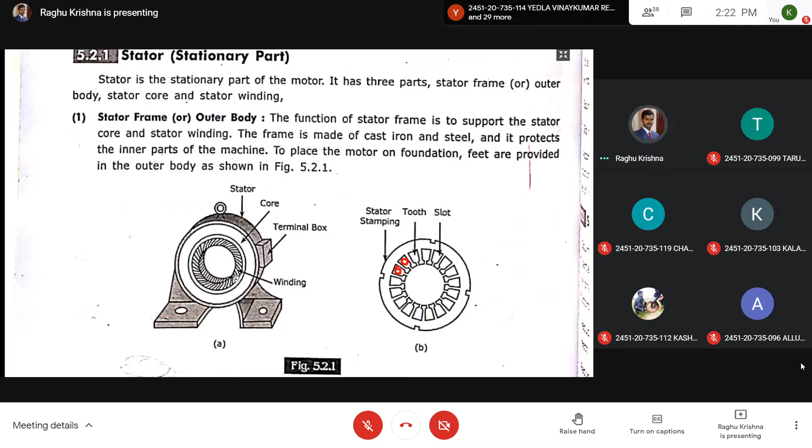If you see a stator, this is the stator. The stator has the stator frame, which is the outer body. Next you have the stator core, and on this core you have the winding. So stator frame or outer body, and on that the core, and on the core the winding. The winding is three-phase winding, and it can be connected in star or delta based on our requirement.

Now here, the stator core is cylindrical in shape and is made up of high-grade silicon steel laminations. The stator core is laminated to reduce eddy current losses. The thickness of the laminations will be from 0.3 mm to 0.5 mm. You can imagine the thickness of the lamination.

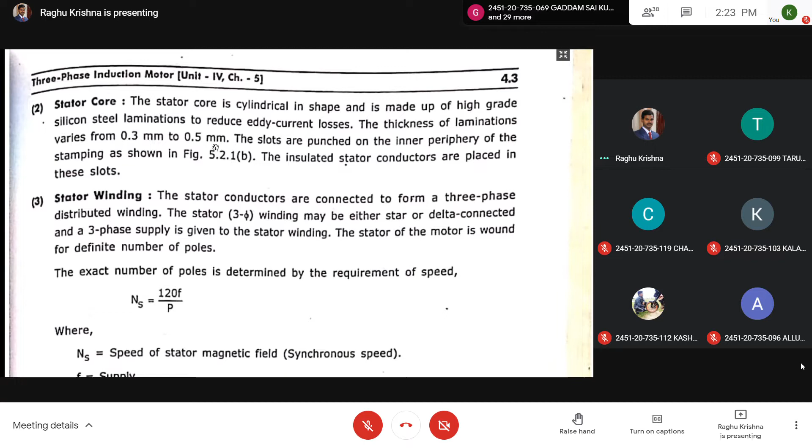Next, the slots are punched on the inner periphery of the stampings as shown in the figure. Here you can see the slots, and on the slots you are going to have the winding. These are the stator stampings, and like this you have the laminations.

This is the cross-sectional view of the motor. Here you can see the wires or the winding. The winding will be placed in the slots, and the winding will not come out of these slots, since the gap is very less.

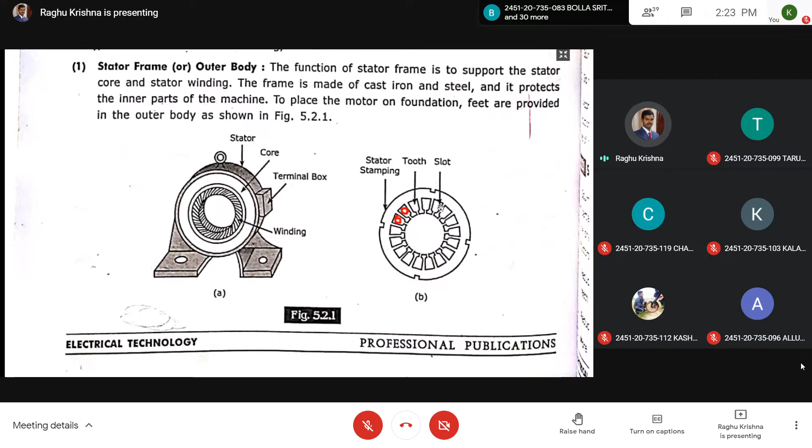The stator conductors are connected in the form of a three-phase distributed winding. The stator winding may be either star or delta connected, and three-phase supply is given to the stator winding. The stator of the motor is wound for a definite number of poles.

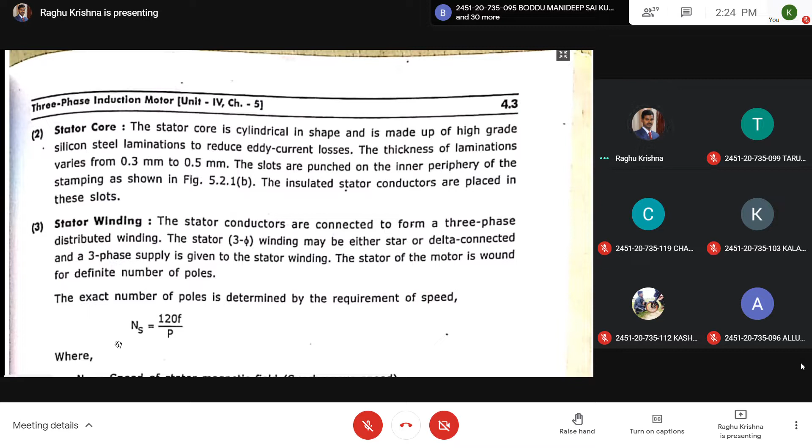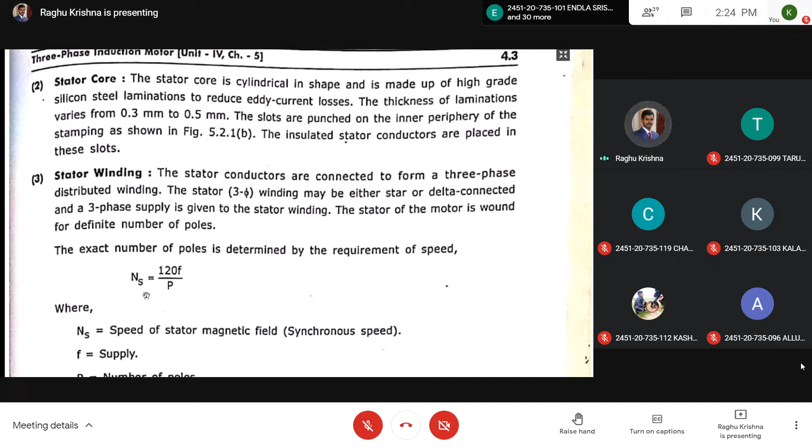Next you are going to study about the synchronous speed. Ns equal to 120 F by P. Ns means synchronous speed, given by 120 F by P. The importance I will explain now. Ns is the speed of the stator - it is the synchronous speed, the speed of the stator magnetic field.

Any doubts? Somebody raise their hand. Okay.

So here Ns is the speed of the stator magnetic field. The stator magnetic field will be rotating at a speed of Ns, which is the synchronous speed. It is given by 120 F by P, where F is the frequency and P is the number of poles.

If you take a two-pole winding, it will be having one north pole and one south pole. If you take a four-pole winding, it has alternatively north pole, south pole, north pole, south pole. So like this, if you take a two-pole...

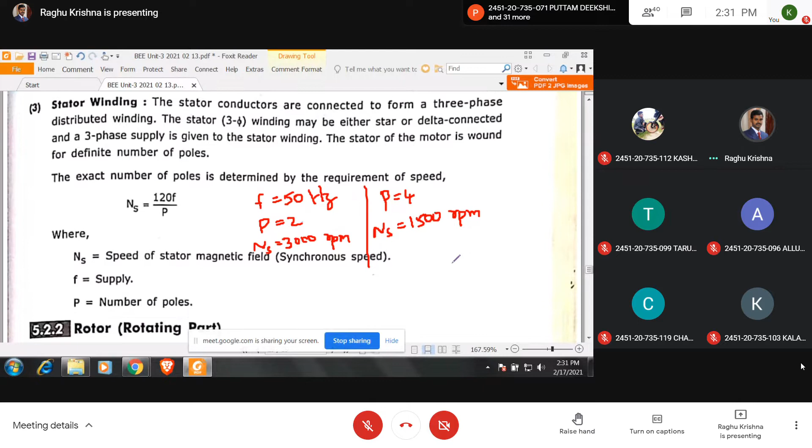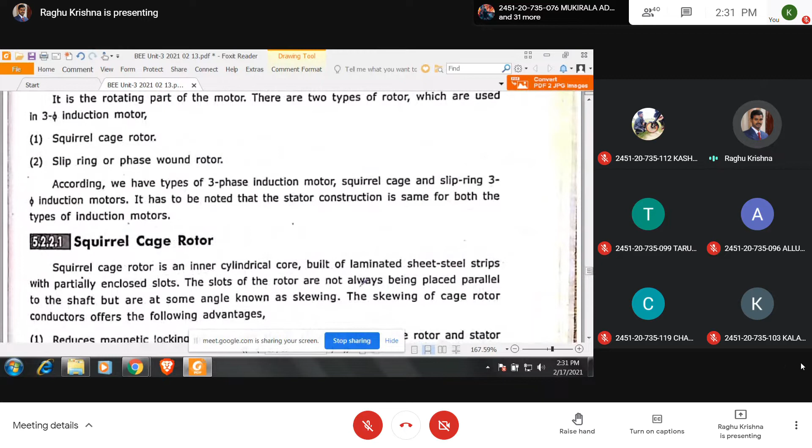Before going to that, let us see this rotor also. A rotor is of two types: the squirrel cage rotor, and this is a wound rotor motor. On the wound rotor, you are going to have three-phase winding.

The rotor bars are given a slight skew in order to avoid magnetic locking. So here the rotor bars are not straight, there will be a slight bend. See here, in this it is clear.

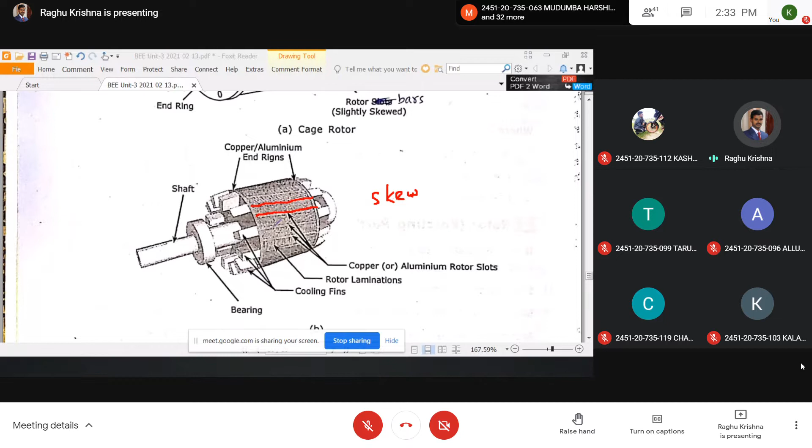Skew means some cross, they are arranged in somewhat a bend. See here, this is given in order to avoid the magnetic locking. So the rotor conductors are given a slight skew in order to avoid magnetic locking.

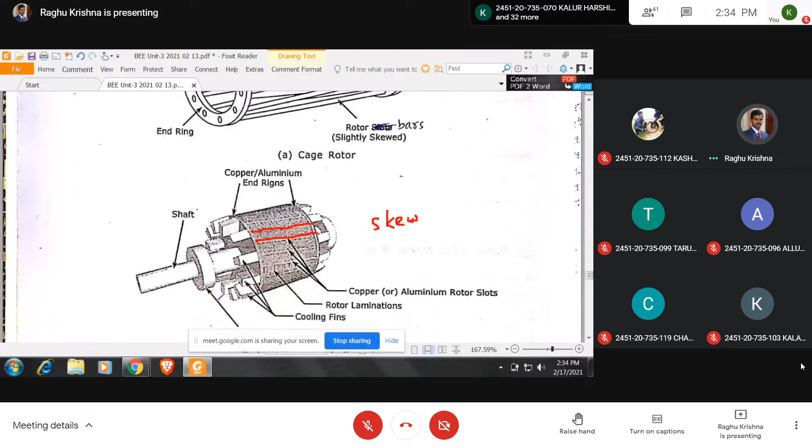Now on the rotor you are going to have these rotor conductors. See here, if you see the above figure, these are only the rotor conductors. The rotor conductors are connected by end rings. These will be present on this rotor. On the rotor you are going to have the rotor conductors.

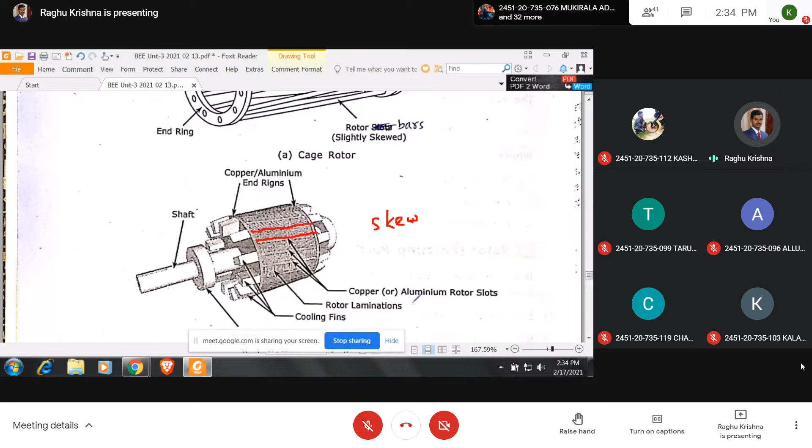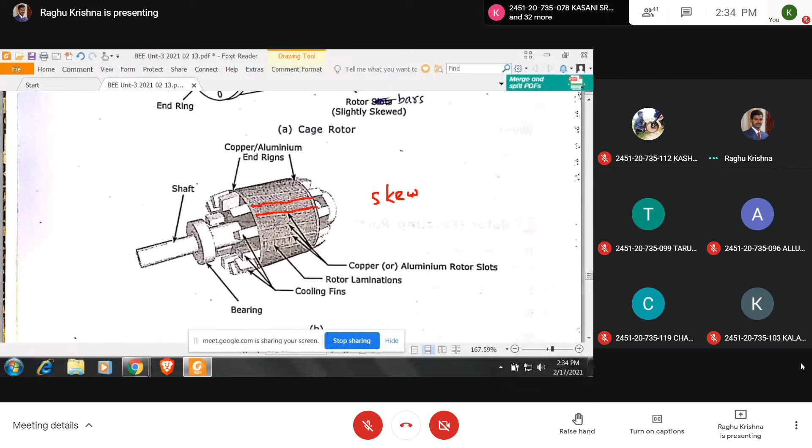The rotor is also laminated in order to reduce the core losses. The rotor conductors are made up of copper or aluminum, and these rotor conductors are placed in the slots. Slots will be given, and on the slots, rotor conductors will be placed.

So the slip rings will be rotating, the slip rings will be rotating with the shaft. The slip rings are attached to the shaft, when the shaft rotates, slip rings also rotate. The contact of a resistor with the slip rings is obtained by use of brushes. So brushes will be stationary here, brushes will be there.

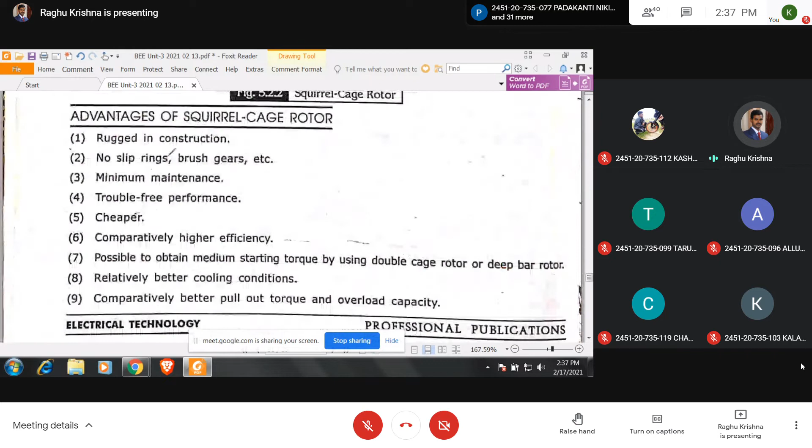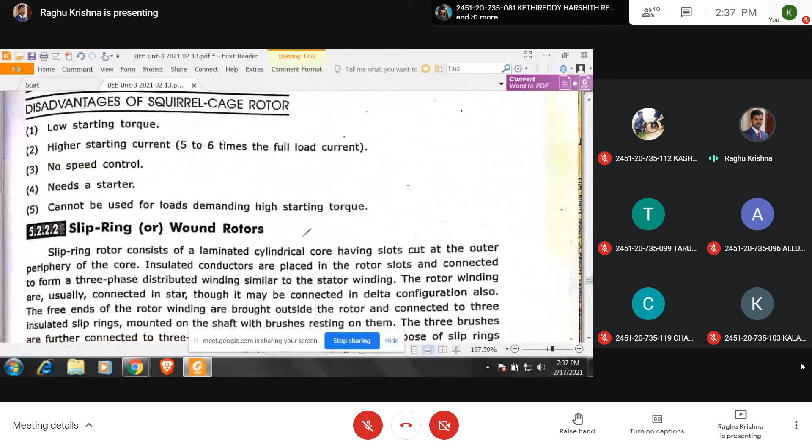So in a wound rotor induction motor, both the stator and rotor have three-phase winding. But in a squirrel cage, on the rotor we are going to have rotor conductors, and the rotor conductors are connected to the end rings. But in a wound rotor, the rotor conductors are connected in a three-phase winding.

So here three-phase winding will be there on the rotor, and the ends of this three-phase winding will be connected to the slip rings, and the slip rings are connected to resistors through brushes. So this is about the construction. Now coming to the operation of this three-phase induction motor.

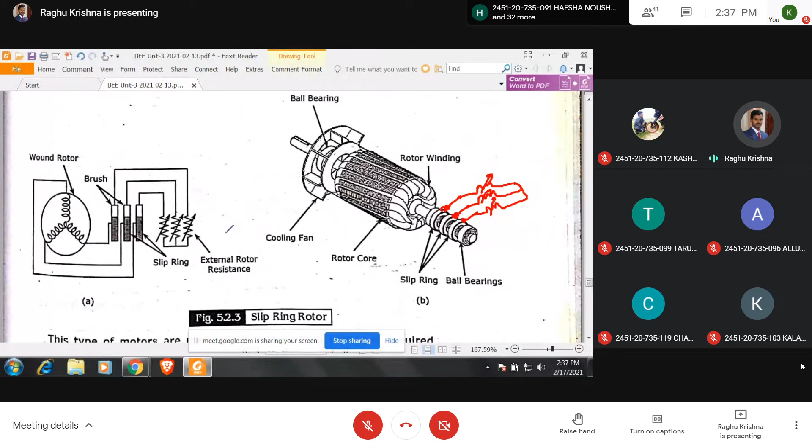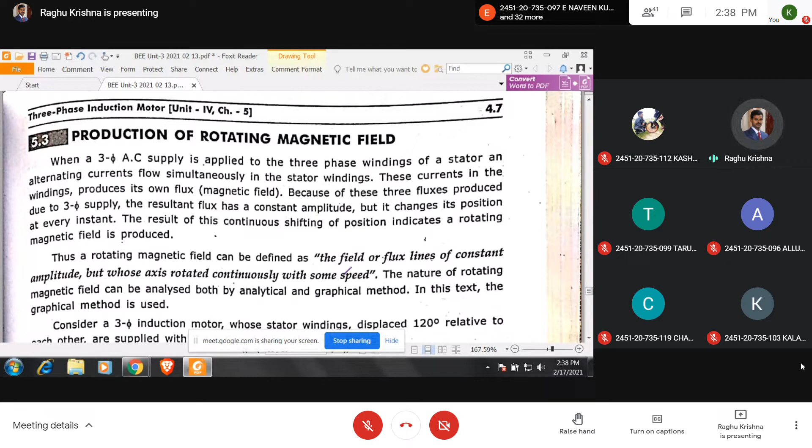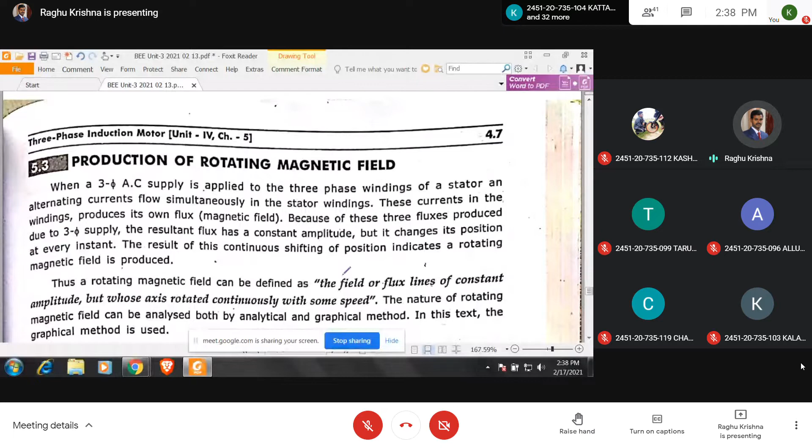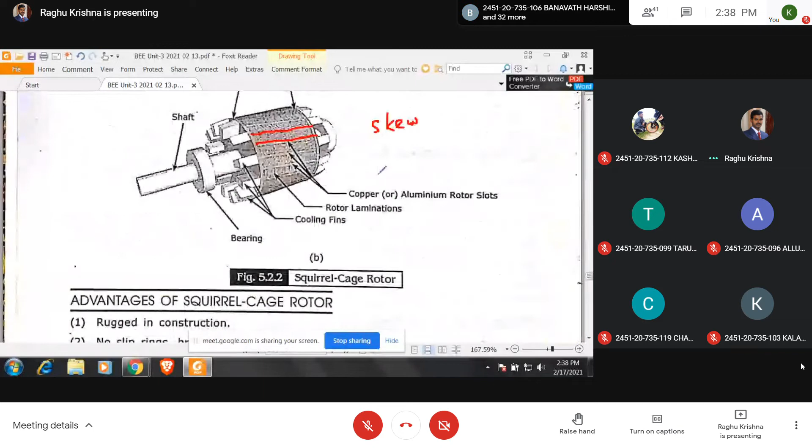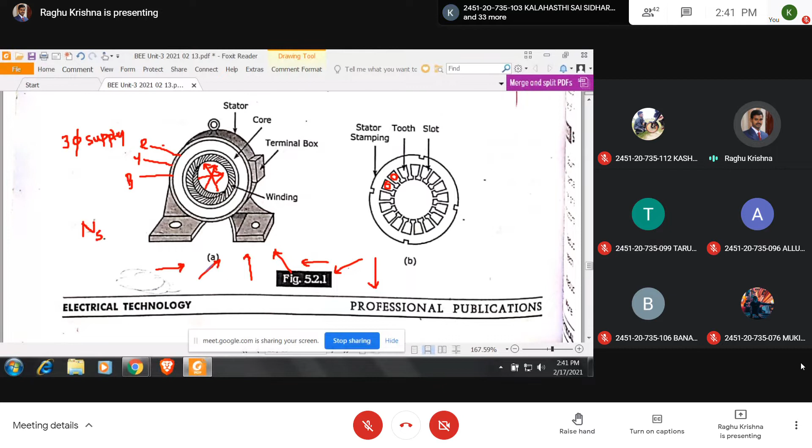So a rotating magnetic field is produced like this. The direction of the lines of force at one instant is this, after some instant it changes to this direction, and then this direction, like this.

This completes one rotation. The speed is given by ns equal to 120f by p, where f is the frequency and p is the number of poles.

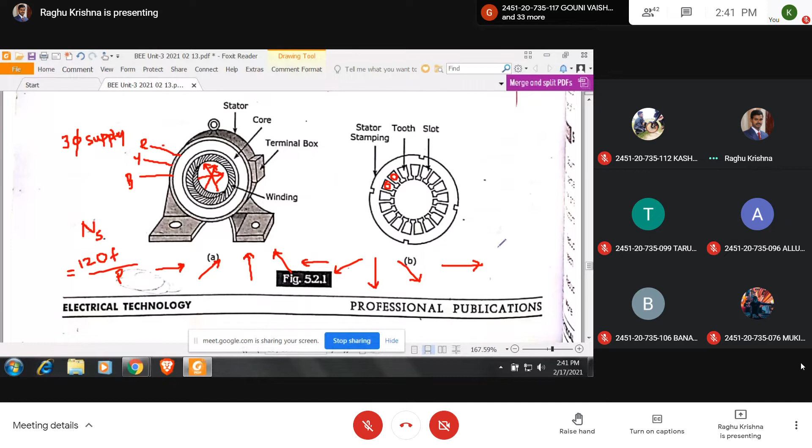Let us take p equal to 2. If f equal to 50 hertz and p equal to 2, what is ns? ns equal to 120 into 50 by 2, which is equal to 3000 rpm.

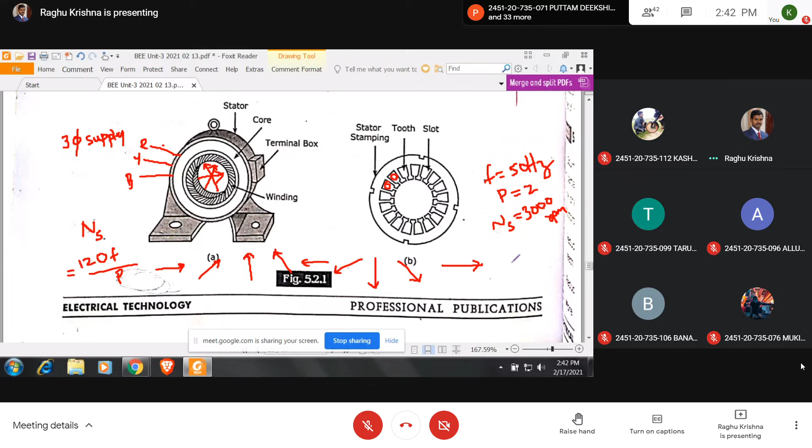So in 1 minute, 3000 rotations will be completed. That means in 1 second, 3000 by 60, which gives us 50 rps. Is it clear?

So are you imagining the speed? When a three-phase supply is given to the stator winding of a three-phase induction motor, a rotating magnetic field is produced, rotating at a speed ns given by 120f by p. In 1 second, it completes 50 rotations, and in 1 minute, it completes 3000 rotations.

Is it clear? Next, I am going to show how a rotating magnetic field is produced. When a three-phase supply is given to the stator of a three-phase induction motor, a rotating magnetic field is produced which rotates at a constant speed of 120f by p.

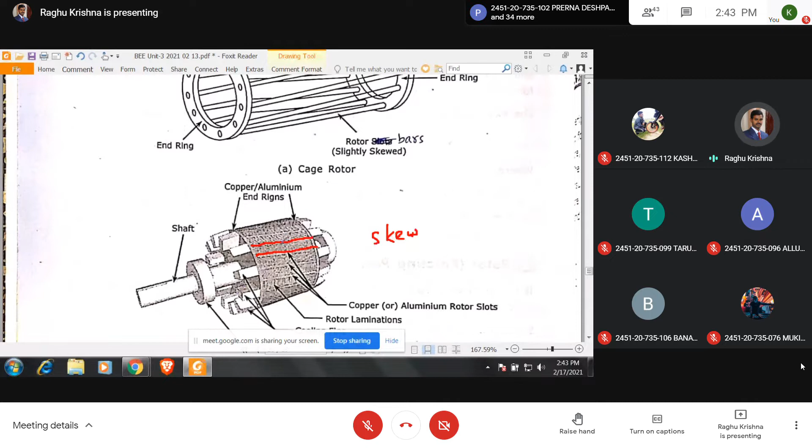Next, in the middle you have the rotor conductors. On the shaft you have the rotor, and on the rotor you have the rotor conductors. This particular type of rotor conductor arrangement is called a squirrel cage rotor.

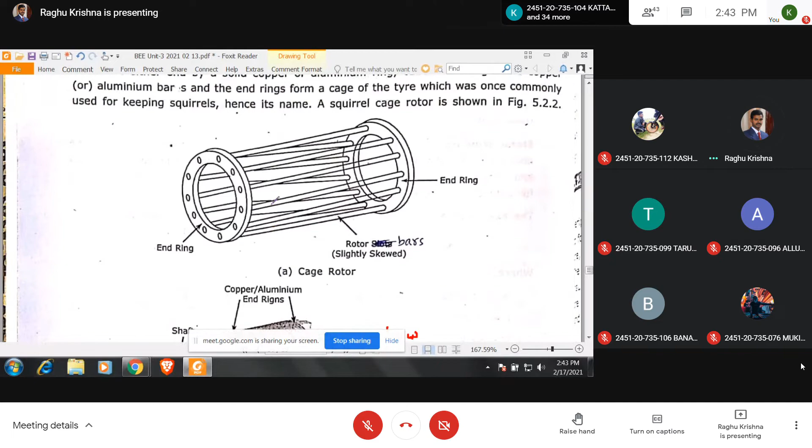Now, this rotating magnetic field induces EMF in the rotor conductors. As per Faraday's laws of electromagnetic induction, when there is a relative motion between the magnetic field and the conductor, EMF will be induced in the conductor.

So this rotating magnetic field cuts the rotor conductors in the middle, and EMF will be induced in the rotor conductors. Is it clear?

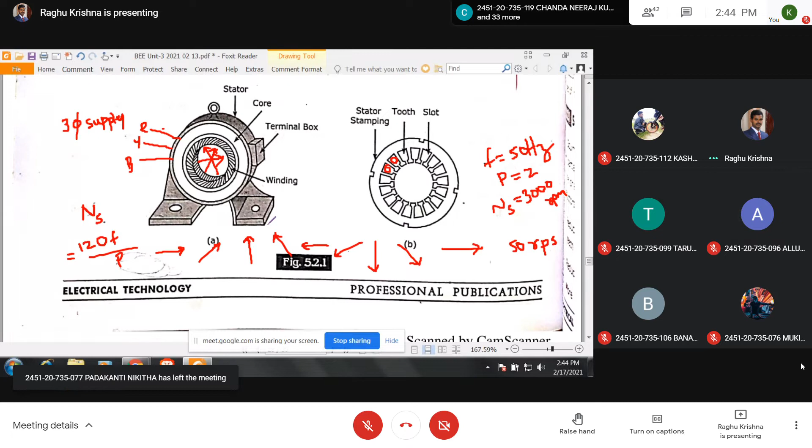See the rotor conductors. When the rotating magnetic field cuts the rotor conductors, EMF will be induced in these rotor conductors. The rotor circuit is a closed circuit, so when EMF is induced, current will be flowing through these conductors, and this current has its own magnetic field.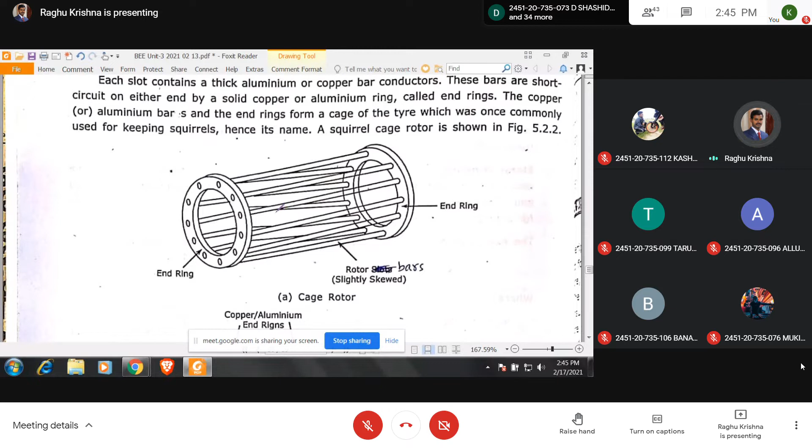Due to these rotor currents, a magnetic field is produced by the rotor. This rotor magnetic field, due to interaction with the stator field, experiences a torque, and the rotor rotates.

So first, when a three-phase supply is given to the stator of a three-phase induction motor, a rotating magnetic field is produced. This rotating magnetic field cuts the rotor conductors and EMF is induced in them. As the rotor conductors are short-circuited, current flows through these rotor conductors, producing a flux.

So you have two fluxes: one is the stator flux and another is the rotor flux. Due to this interaction, the rotor experiences torque and rotates in the direction of the rotating magnetic field. This can be explained in other words also.

You know that when a current carrying conductor is placed in a magnetic field, it experiences torque. Now, when a three-phase supply is given to the stator, a rotating magnetic field is produced. This rotating magnetic field cuts the rotor conductors and EMF will be induced in the rotor conductors. As the rotor conductors are short-circuited, current flows through them. These rotor currents interact with the rotating magnetic field and experience a torque, and the rotor rotates in the direction of the rotating magnetic field.

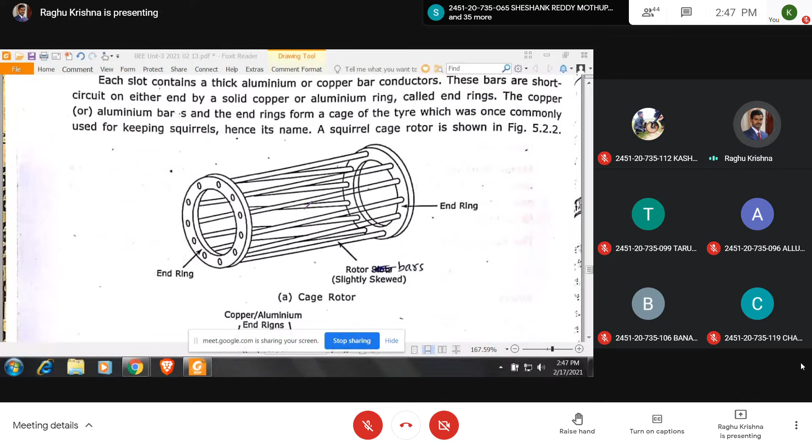Is it clear? Anyone understood? Number 64, 65. Do you want to say anything? Keep your microphones on mute.

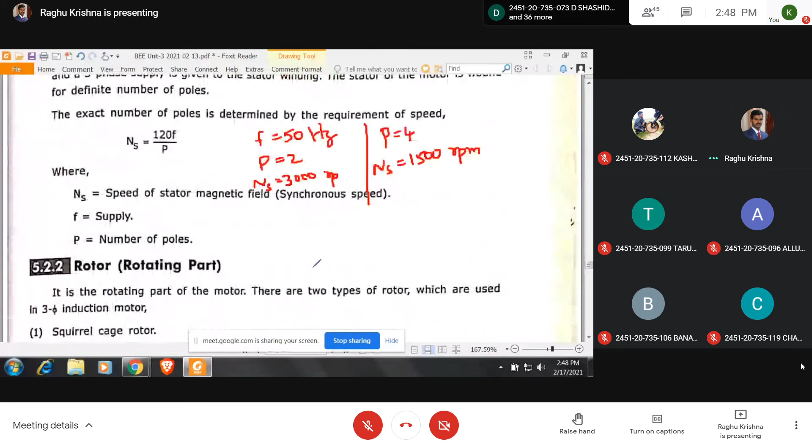Okay, see here, once again I will explain. When a three-phase supply is given to the stator, a rotating magnetic field is produced. This rotating magnetic field cuts the rotor conductors and EMF will be induced in the rotor conductors. As the rotor conductors are short-circuited, current flows through the rotor conductors. These rotor currents interact with the rotating magnetic field and rotate in the direction of the rotating magnetic field. This is a very simple explanation.

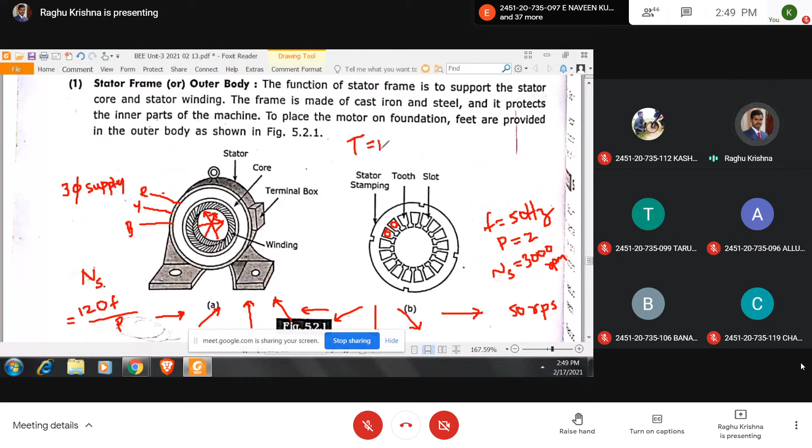You know that the motor principle is: when a current carrying conductor is placed in a magnetic field, it experiences torque. Do you remember this? Torque equals BIL. So the torque experienced by the rotor conductor is equal to BIL, where B is the magnetic flux density, I is the current flowing through the conductor, and L is the length of the conductor. So when a current carrying conductor is placed in a magnetic field, it experiences torque, given by BIL.

Is it clear, or shall I explain once again? Yeah, please respond. Number 117. Yes, sir.

Have you understood the operation of a three-phase induction motor? Yes, sir.

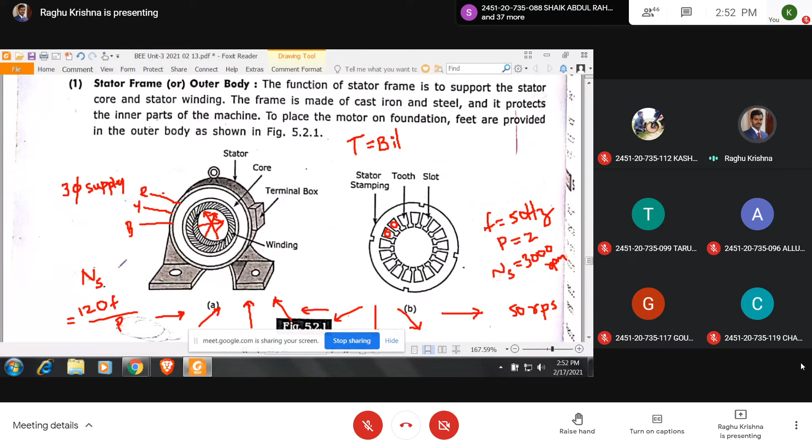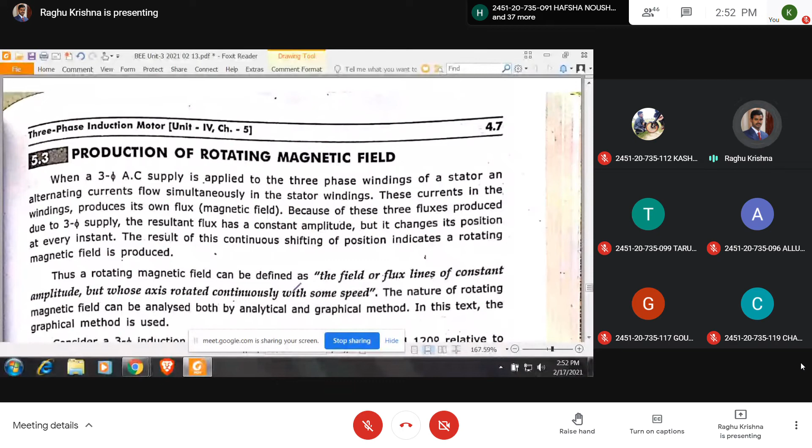Here is phi B. The orientation of the windings is such that the fluxes have a phase angle, and the windings are displaced in such a way that phi A is the positive direction of flux phi A, and phi B phasor is the positive direction of flux phi B, and phi C is the positive direction of flux phi C. The windings are also physically displaced, and they also have a phase angle between them. You know that for alternating flux, the magnitude increases, then decreases, and changes its direction. If phi A is the positive direction of the flux phi A, then the negative direction is just opposite.

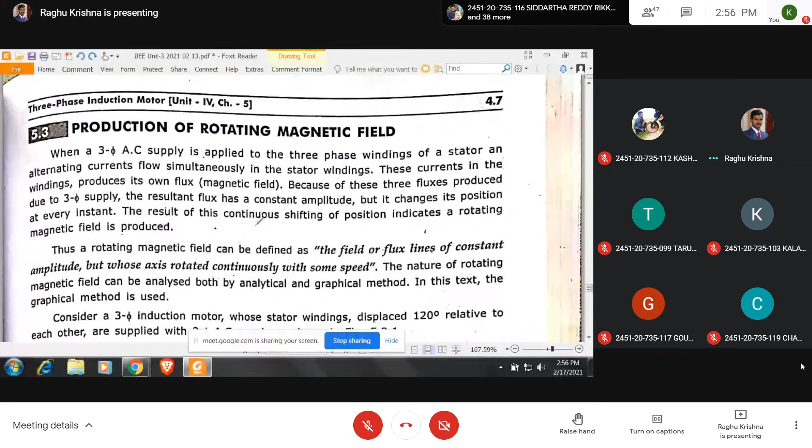See here, the wordings also you can see here. So a rotating magnetic field can be defined as the field or flux lines of constant amplitude, but whose axis rotated continuously with some speed.

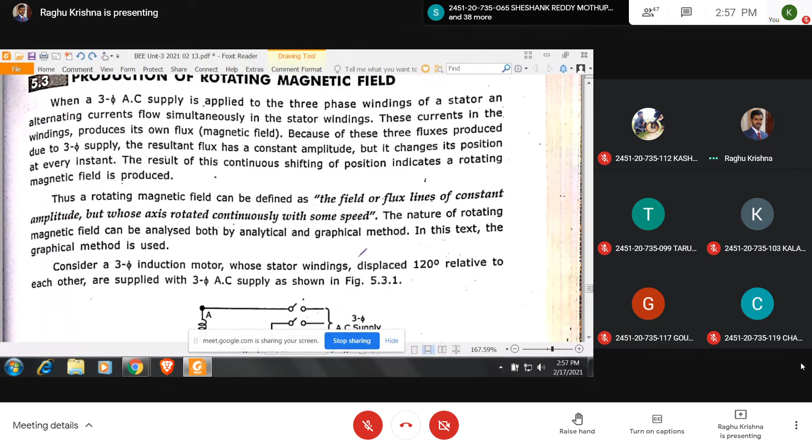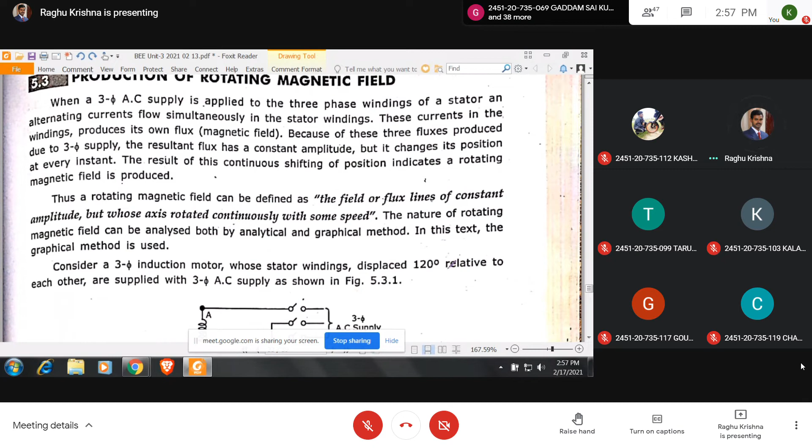Consider a three-phase induction motor whose stator windings are displaced 120 degrees relative to each other physically, and also they are supplied with three-phase supply. Here phi A, phi B, phi C are the positive directions of the fluxes phi A, phi B, and phi C respectively.

Now consider the instant omega t equal to 0. So at omega t equal to 0, what is phi A? Phi A equal to 0. What about phi B? Phi B is negative. What about phi C? See here, the dash is bigger dashes, so phi C is positive.

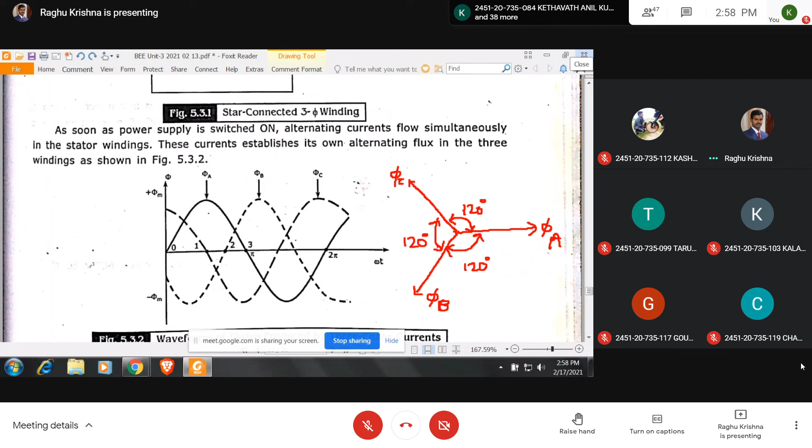That means this shows the direction of the fluxes. Now phi A equal to 0, phi C positive, phi B negative. So at instant omega t equal to 0, phi A equal to 0, phi B is negative, and

the magnitude is minus root 3 by 2 phi m. See the magnitude, what is phi B? So phi B, this is phi B, small dashes. Phi A is solid curve, dashed curve is phi B, phi C is long, somewhat big dashes.

At omega t equal to 0, at this instant, phi A equal to 0, phi B is negative, phi C is positive. What about the magnitude of phi B? This is 30 degrees, right? So at 30 degrees, it is having the maximum value.

So at this instant, phi B is maximum. This is 30 degrees from 0 to this point. This will be minus root 3 by 2 phi m at this point. What about this one? This is 0. From here to here, 60 degrees. This is phi m sine 60. Here this is minus phi m sine 60.

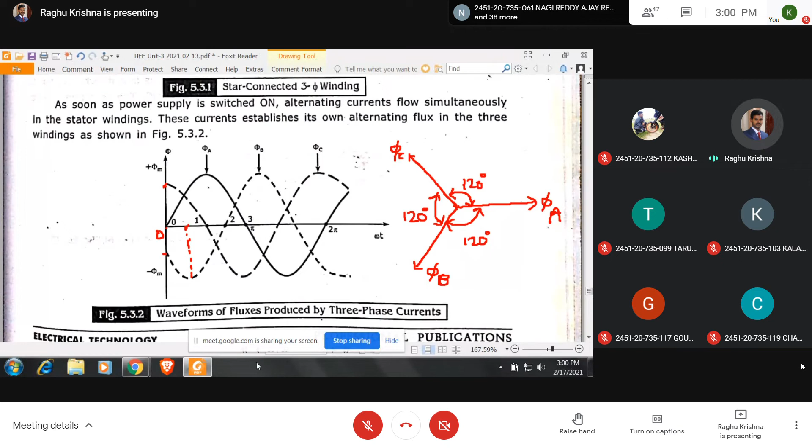So relatively, you are going to get this type of phasor. So here phi a equal to 0, phi b equal to minus root 3 by 2 phi m, phi c equal to root 3 by 2 phi m.

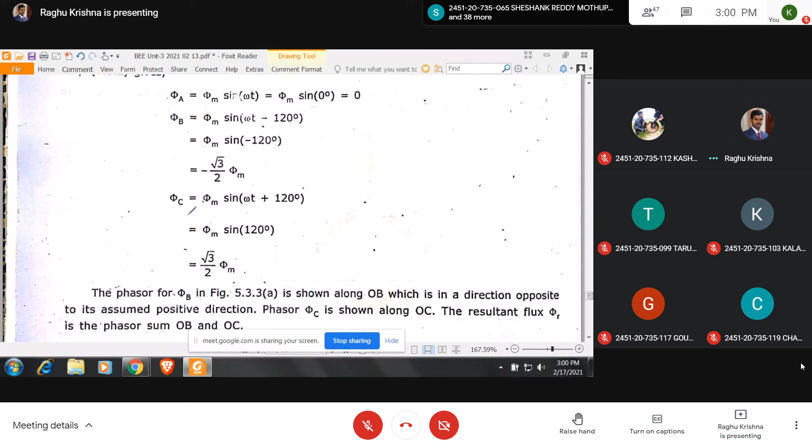If you add these three, let us add these three. At omega t equal to 0, phi c is positive, phi b is negative. So minus phi b will be in this direction. Actually, this is the direction of phi b, the positive direction of phi b. So as phi b is negative, you have to take it in this direction.

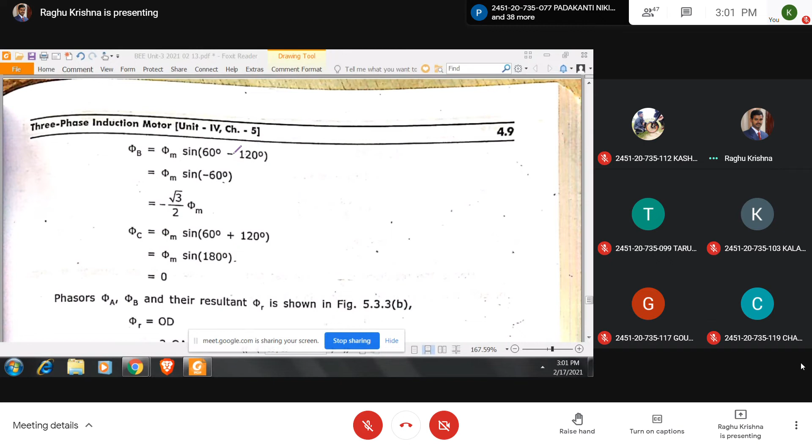So this magnitude is root 3 by 2 phi m. If you do the phasor sum of these two, you are going to get the resultant as 3 by 2 phi m. It is already shown here. So if you add these two, you are going to get the resultant as phi a phi b, so the resultant will be 3 by 2 phi m.

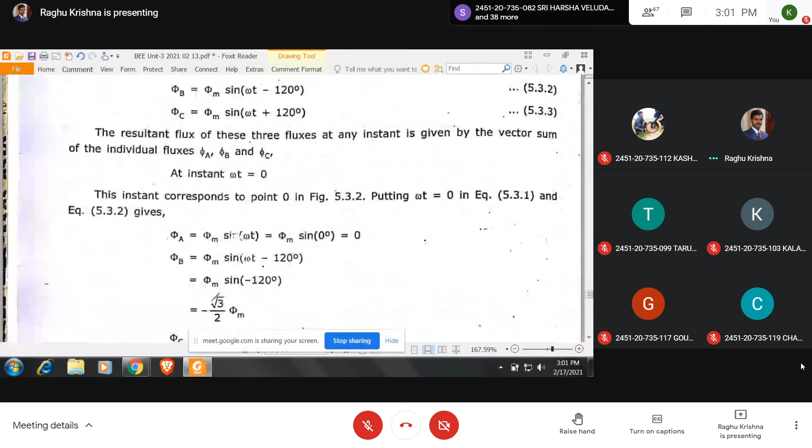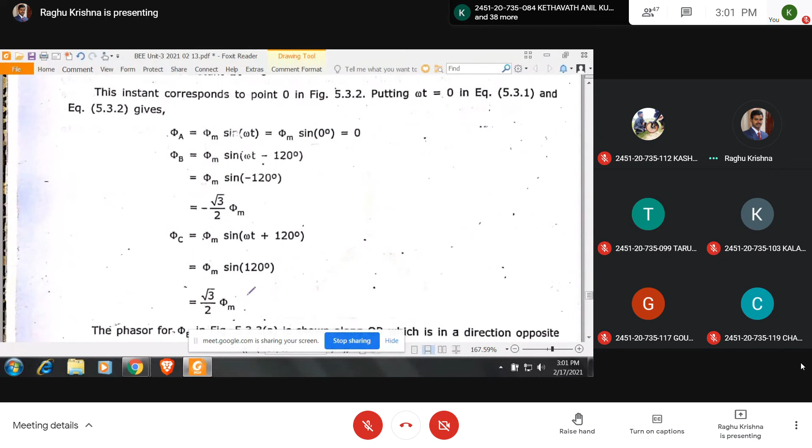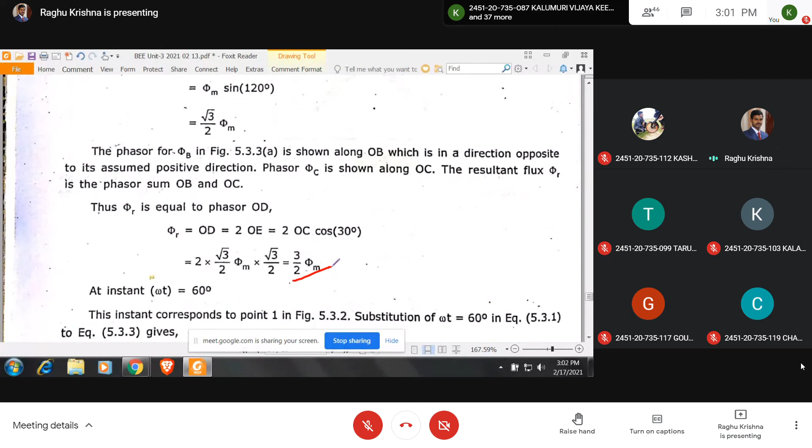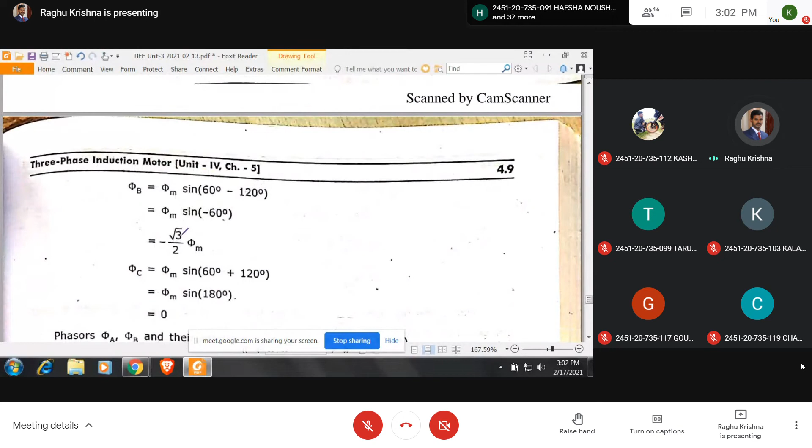At omega t equal to 0, phi b is minus root 3 by 2 phi m, phi c is root 3 by 2 phi m, and phi r, if you want phi r, it is equal to 3 by 2 phi m. At omega t equal to 60 degrees, phi a equal to positive, phi b is negative. These are obtained from the waveforms. Phi c is 0. So if you add these three, you are going to get the resultant as same 3 by 2 phi m.

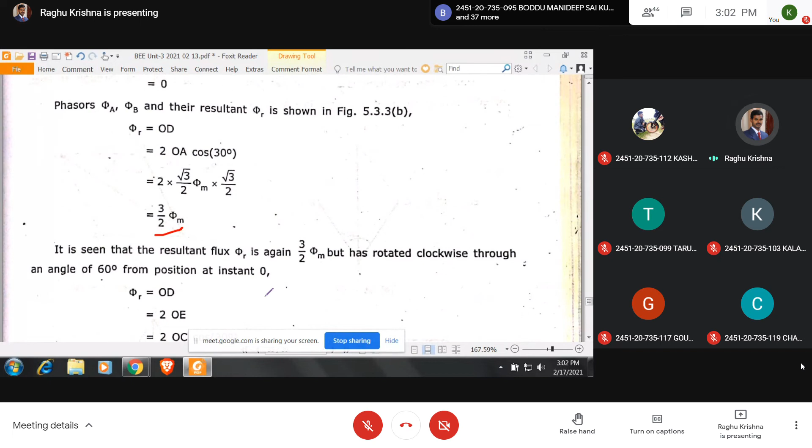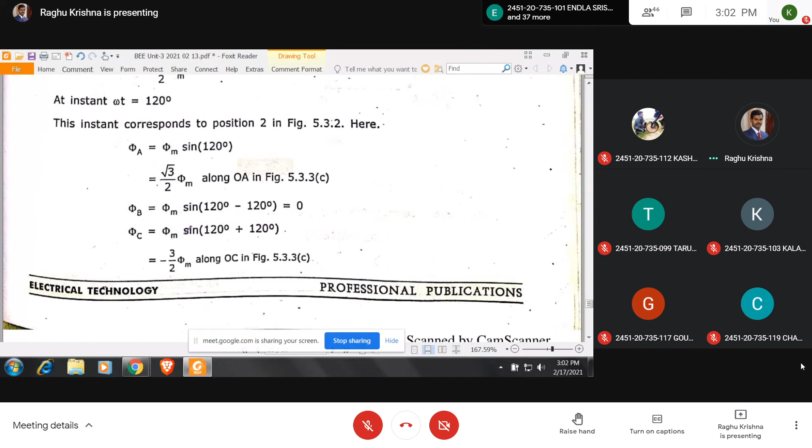At instant 120 degrees, you are going to get 3 by 2 phi m. Let us see the diagrams. At omega t equal to 0, phi c positive, so same direction of phi c. Phi b is negative, means minus phi b in this direction. This is the direction of minus phi b. If you add these two, you are going to get 3 by 2 phi m.

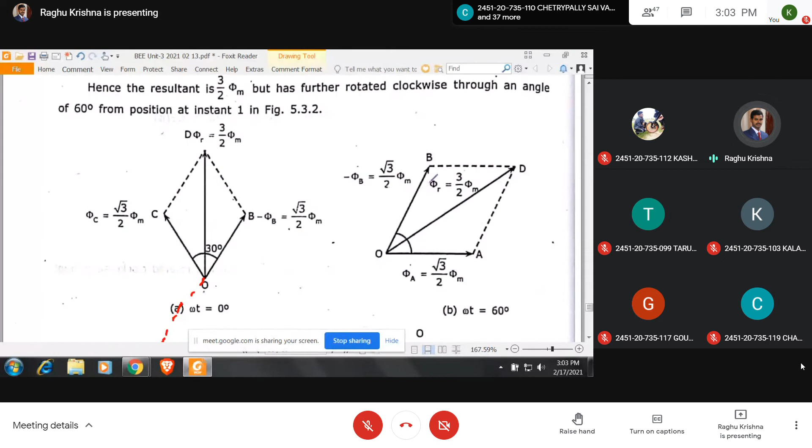Now at omega t equal to 60, phi a is positive and its magnitude is root 3 by 2 phi m. And what about phi b? Phi b is negative, so in this direction, this is minus phi b direction. So root 3 by 2 phi m, you are going to get 3 by 2 phi m.

At omega t equal to 120 degrees, see here, this is vertical. It is changed to like this.

So it is rotated through 60 degrees. At omega t equal to 0, it is vertical. At omega t equal to 60 degrees, the resultant magnetic field rotated by 60 degrees in clockwise direction. Next, at omega t equal to 120 degrees, again it is rotated by another 60, total 120 degrees. So here phi r, the resultant flux is 3 by 2 phi m.

Next, at omega t equal to 180 degrees, it is vertically down. So here the magnitude is 3 by 2 phi m. You can see that resultant flux. So here this is the resultant flux. Middle one, this is the resultant flux, and here this is the resultant flux.

So it is rotated by 60. At omega t equal to 60, it is rotated by 60. Next, at omega t equal to 120, again it is rotated by another 60. Total is 120. Here, this is the resultant flux. So here you can see the direction of the rotating magnetic field. The field rotates, and it is rotating in clockwise direction.

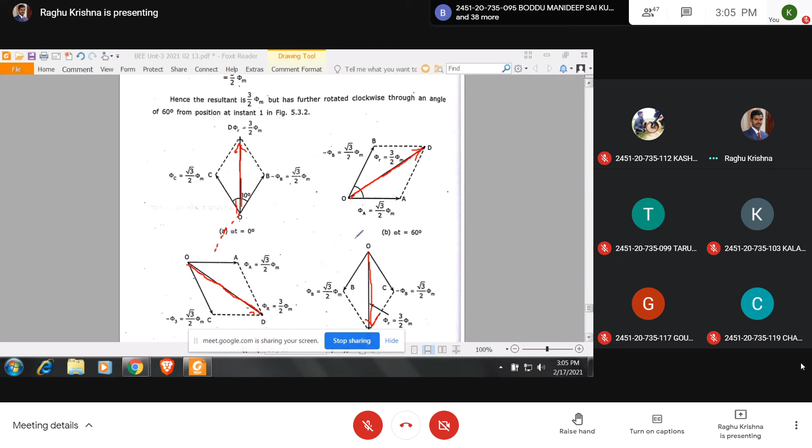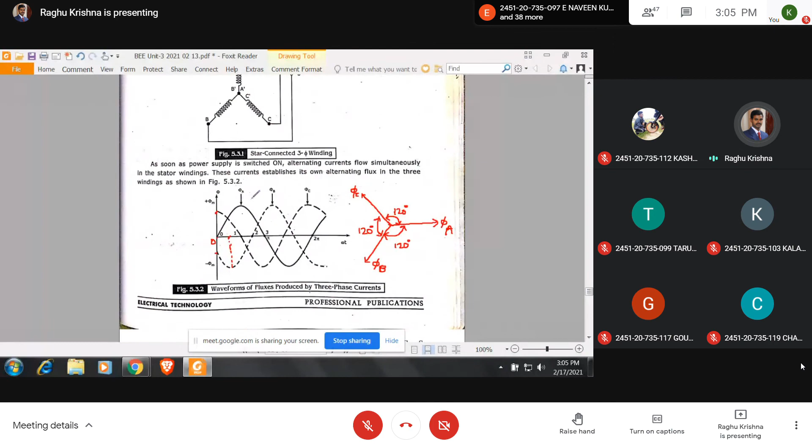So here the phase sequence is ABC. Instead of ABC, if you have ACB, the rotating magnetic field rotates in anti-clockwise direction.

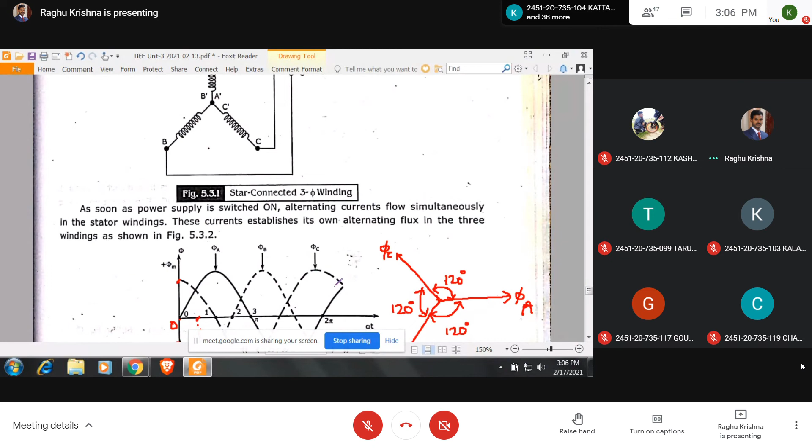So here this is about the rotating magnetic field. You can see the rotating magnetic field is rotated with constant amplitude of 3 by 2 phi m, and the direction of the rotation can be changed by changing the phase sequence.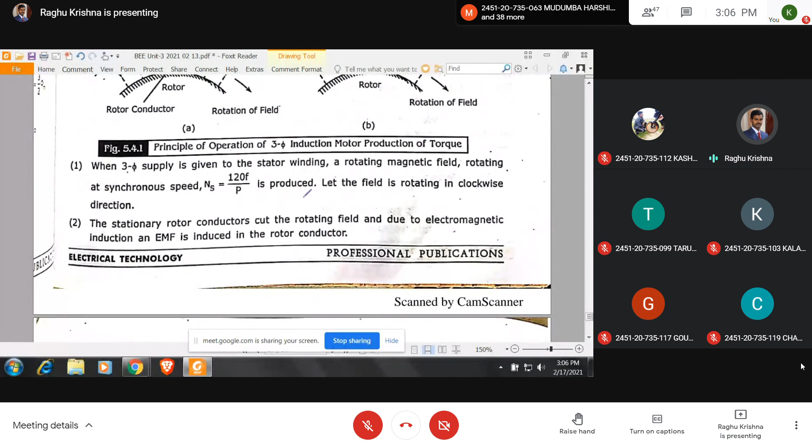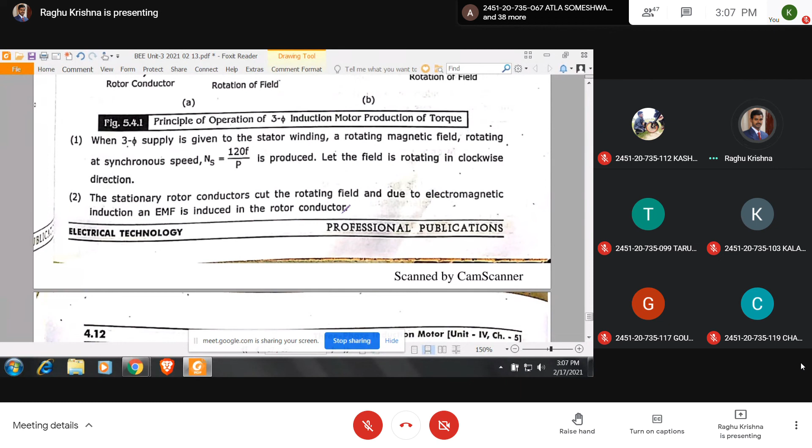The field is rotating in clockwise direction. The stationary rotor conductors cut the rotating magnetic field, and due to electromagnetic induction, an EMF is induced in the rotor conductors. So when the stationary conductors cut the rotating magnetic field, an EMF is induced in the rotor conductors.

Second point. Since the rotor circuit is complete, either through the end rings in case of a squirrel cage rotor, or an external resistance in case of slip ring rotor, the induced EMF causes a current to flow in the rotor conductor. The direction of this induced current is given by Fleming's right hand rule.

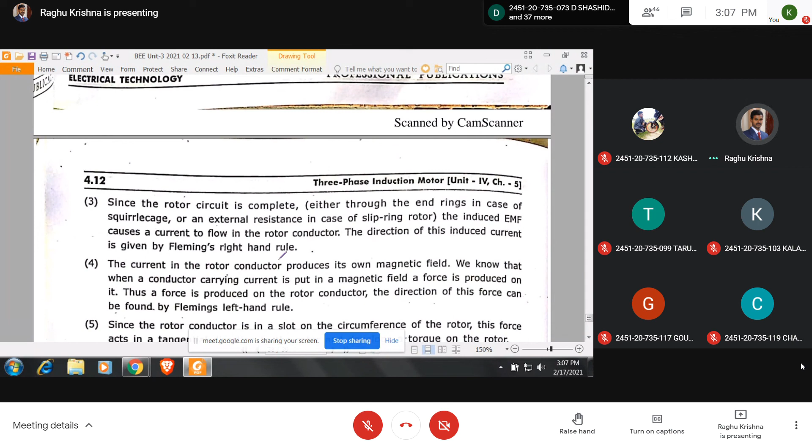Right hand rule means if you stretch the thumb, middle finger and forefinger in the direction of the magnetic field and motion, thumb indicates the motion of the conductor, forefinger indicates the magnetic field, middle finger the direction of the current.

The current in the rotor conductors produces its own magnetic field. We know that when a conductor carrying a current is put in a magnetic field, a force is produced on it. Thus, a force is produced on the rotor conductor. The direction of this force can be found by Fleming's left-hand rule.

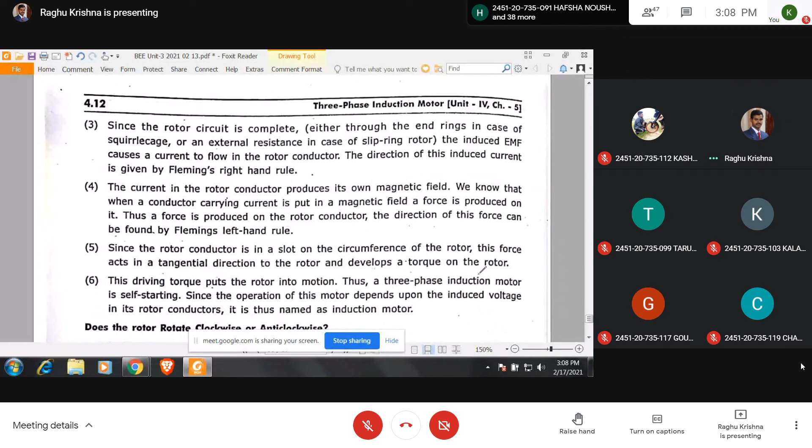Since the rotor conductor is in the slot on the circumference of the rotor, this force acts in a tangential direction to the rotor and develops a torque on the rotor. Rotor conductors will be placed on the rotor, so rotor conductors experience the torque, thereby they will rotate the rotor also.

So this driving torque puts the rotor into motion. Thus a three-phase induction motor is self-starting. Since the operation of this motor depends on the induced voltage in its rotor conductors, it is thus named as induction motor. The transfer of power from stator to rotor is inductively. There is no electrical connection between the rotor and the stator. The power is transferred from stator to rotor through induction. That's why it is called an induction motor.